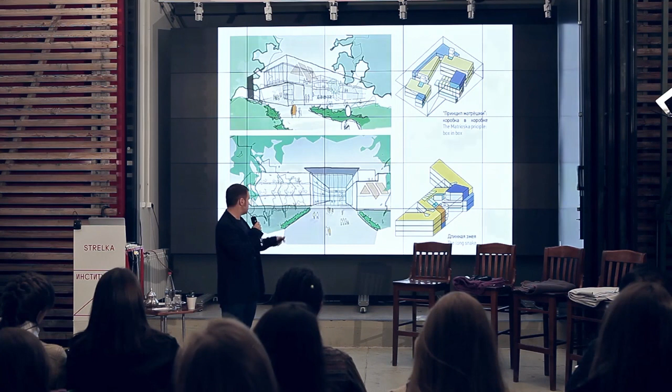Then we started to work with slim kind of buildings, like almost like snakes, looking at atria that could happen in between the buildings. In some discussions, also with Thomas, we figured out the most sustainable way to get a very small footprint would be to build parallel building blocks and use the space in between as a kind of atrium.

Since the client not only wanted 2 offices, which would be the best thing for an office, they also wanted a library for people to use and a lecture hall, we needed a 3rd volume as well.

We figured out that putting the program in, the logo of the company was actually a perfect shape for this new building, and would fit the program ideally with all the square meters. So from that we developed the building from the logo, distributed the functions, changed the distance a bit to let more light in and have views into the factory, and closed the spaces in between as atriums for people to use in winter, spring and autumn. That was basically the design of the building.

Since we are on a huge factory site, the building is located here, the good thing was that we were free in the rotation of the building, because you're not in a city where it has relationships with close by buildings. I'll show you later why that was important in the design as well.

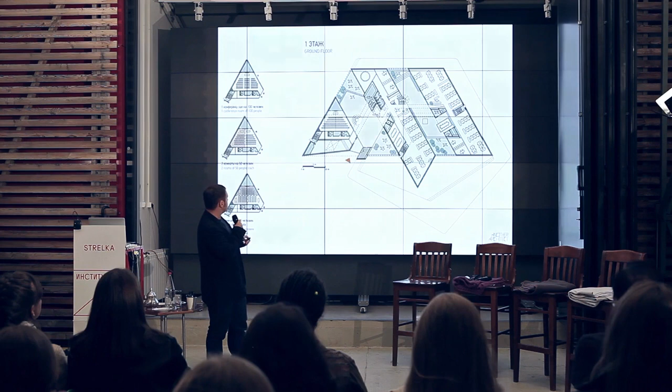So if you enter the building here, you get into this main atrium, and kind of like hybrid things, that is probably one of the strategies for future buildings, or how to engage with people. This atrium can work as a space for celebration, for New Year's, stuff like this as well. And it can open directly to the auditorium, so after a lecture or a symposium, you could open it up and use this as an extension of that space. So almost like a lobby as a party space.

You see here, so we have the normal fire staircases, but inside the atria we have these more sculptural staircases, which are communication spaces. They're quite big, and they're for people to meet. The communication between the building parts happens with these bridges, where people can stop by and talk with each other.

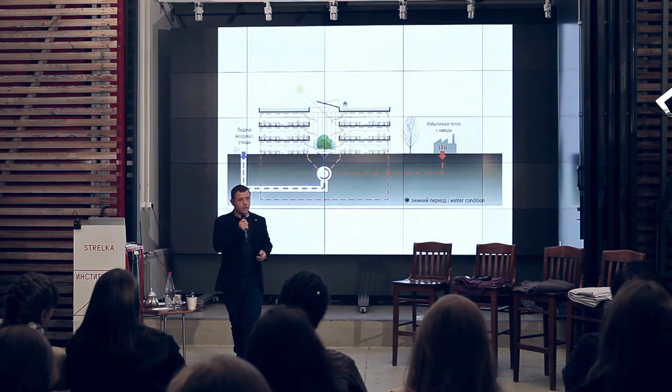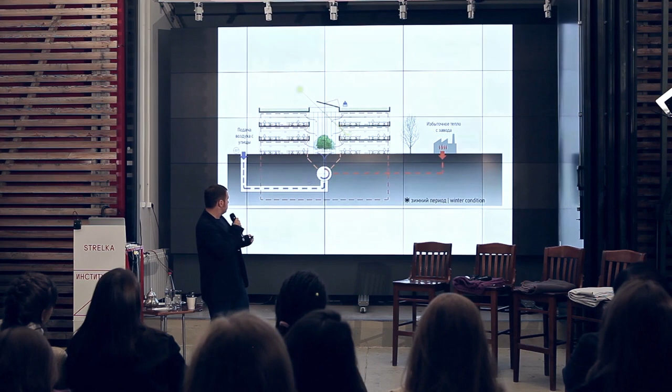The atria are important as well in the sustainable energy concept. In winter, we use them for sucking out the air from the offices. So the warm air is taken out here, and we regain the heat through a heat exchanger, and pump in waste heat from the factory. So they become almost like air collectors for the waste air from the offices.

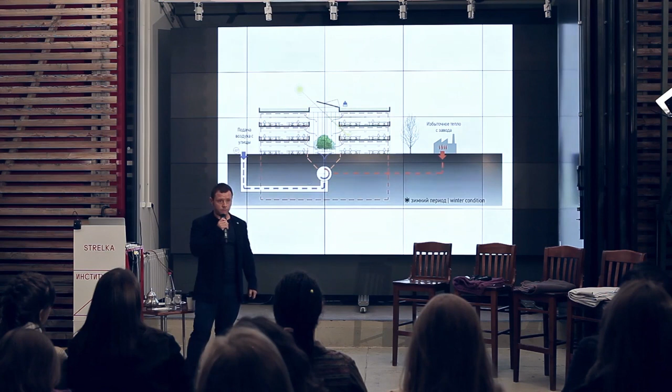And in summertime, they work like a chimney, so they heat up more than the office spaces, and they work as natural ventilation for the office spaces that are surrounded.

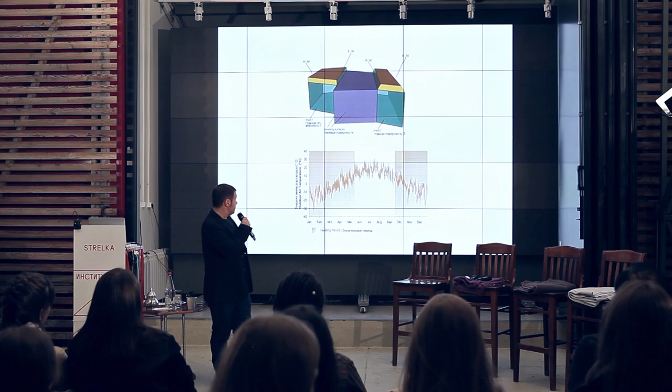And what we started to do is look at the passive solar gain of the atria spaces as well, because in summer they should heat up as much as possible in order to work as chimneys. Also in winter, you want to pump in as little energy as possible into them. So it's quite important how much gain from the sun you actually get on the surfaces and inside these atria.

We worked with a simplified model. So you see this is one of the offices, this is atrium 2. We looked at different orientations and how much passive solar gain you get into this atria, and if it changes if you rotate the building a little bit. We made this comparison, and we figured out one of the positions, this one, where you have substantially more heat gain from the sun just by the orientation of the building. So there's no extra technology, it's very low tech, it's just about the rotation of the building, and you maximize the solar gains inside the spaces, which you then don't need to heat up.

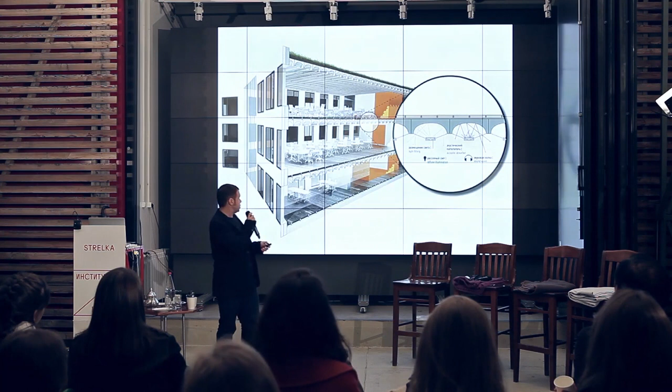So we worked out with Thomas a system where we use the ceiling - so we don't have a false ceiling, but the ceiling is exposed concrete in order to catch the heat at daytime. When the offices get really hot in daytime, the heat goes up and the concrete saves the energy, cooling down the office space. At night we just open the windows and let the concrete cool down for the next day, so it can start on a cooler temperature because of this 10 degree drop. By this we can save the air conditioning because we only needed it for a couple of days in the year. So this system hopefully will work and we won't need to install air conditioning at all.

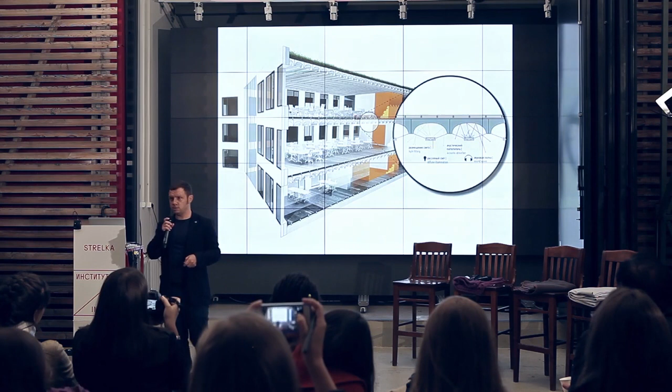What that means for us is that you have to run all the cables and everything on the ground floor of the building, so we had to put in a false floor - that was the decision for this. And if you know buildings, the problem with exposed concrete is that you get very bad acoustics. That's why most of the time they put a false ceiling, to increase the acoustics, and especially in an open office where there's a lot of people talking on the phone or with each other, that might be a problem.

The solution was to put these half circles in here. It's basic physics - if you get the sound waves in, they all get collected in the center.

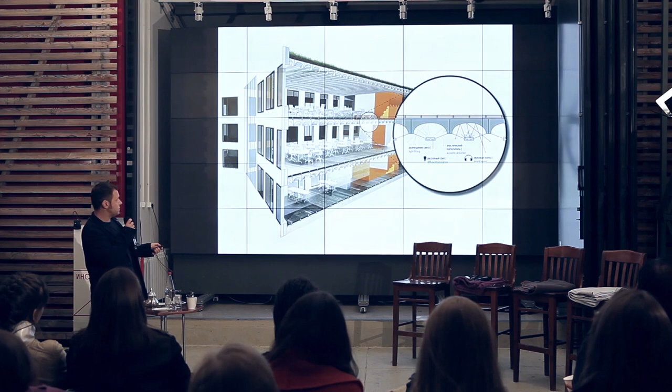In the center we have a little element with an acoustic absorber, so the sound is collected in the center and it quiets down the office while covering just a very small percentage of the ceiling space. At the same time, with new modern LED technologies, you can put a small LED here, and using the same physical principle in the other direction, you get equal and nice lighting inside the office space.

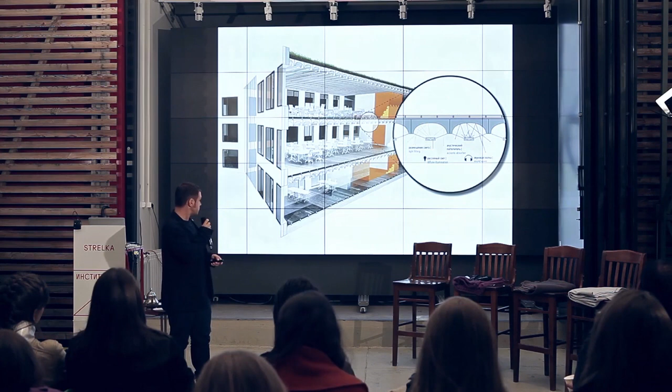Thanks a lot, and I think Thomas, you are— Yeah, Daniel, thank you very much. I think both talks were very interesting.

Bruce, starting to talk about what a building can do for a city—I think we all dream of doing a building which creates the Bilbao effect, so that the building makes a big change for a whole area, not only the city but the whole area. The question we have to discuss today is whether an iconic, sculptural building can achieve such an effect, or whether it should be created more by content. Since we don't have any discussion yet, I'd be happy if you could interact. If anybody has questions as we have this debate, raise your arm and we're happy to include you. Like Daniel was talking about participation in the design process, let's talk about participation in this discussion, so it's not just a front discussion.